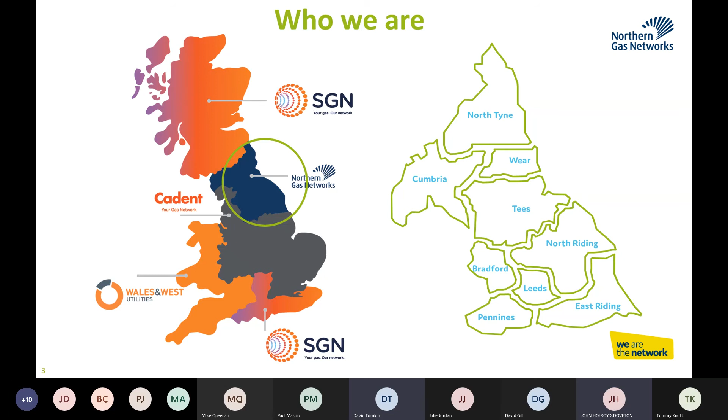So we want to start looking at the why: all this talk of hydrogen and all the need for change. And I think it's pretty much certain that most people accept that climate change is going to be the most significant technical, economic, social and business challenge that we face in the world today, coronavirus aside. The UK, along with most countries around the world, recognises the challenges of this as well.

And back in 2019, the UK committed to reaching net zero emissions by 2050, having already committed to reducing our carbon emissions by 80% of their 1990 levels. And this has been enshrined in legislation under the UK Climate Change Act 2008. But prior to the Leeds City Gate report, which I believe Dan Sadler spoke to you about in the past, little investigation had been done into the opportunity to decarbonise the actual network at the scale to help with this. So everyone, I think, thought it was a dead asset.

So why the gas grid? I think it's pretty much certain that we recognise that it's got a proven history of secure energy transmission around the country. It's unaffected by weather, and it's a world-class grid as well, which heats 83% of buildings and almost all commercial industrial heat as well. So it's a prime place to deliver the energy we need.

The network's been designed to meet the energy demand for weather conditions occurring once every 20 years, i.e. an exceptionally cold day, requiring all appliances on, and it was actually validated back in 2018 with the Beast from the East, and we'll all remember that one. So it proved that the gas network is resilient.

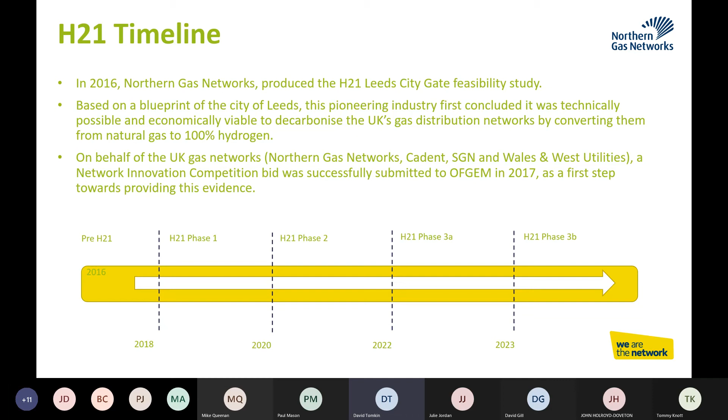So as I've mentioned, it's been identified as a key project moving forward, and we've identified some key pieces of work that will help us demonstrate that we can transport hydrogen safely. So we're going to start looking at some of these things. But I'm going to clear up a few terms before we go on further, because I'm going to be repeating them a few times, specifically what's called an NIC and an NIA, as the programme is made up of a mixture of these. Now, the NIC is the main phases, if that makes sense. Phase 1, phase 2, phase 3.

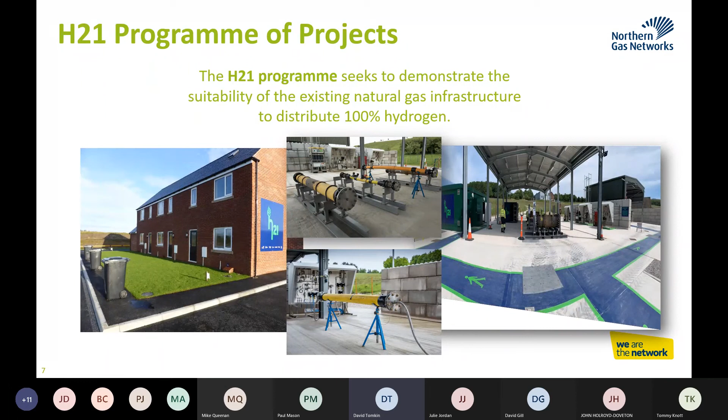And that is called a network innovation competition. So it's a yearly pot of money set aside by Ofgem that the gas networks bid for various projects. Whereas an NIA is a set allowance, a network innovation allowance, that each network gets to fund small-scale innovative projects, and it's part of the price control settlement set by Ofgem. The NIAs aren't focused solely on projects with low carbon benefits, but the NIC is, and the NICs are generally used for the larger funds. So I just want to clear some of them up because we do love our TLAs in the gas industry, the good old three-letter abbreviations, and there's a couple more.

So phase one. Phase one of the NIC H21 project was split into 2 main phases, 1A and 1B. Now 1A was the asset collection and background testing on what was the world's first bespoke facility based at the Health and Safety Science Division in Buxton. That set of tests covered a huge range of metallic and polyethylene assets, valves, joints, fittings and pipes from across the UK and from different pressure tiers and different diameters.

So as part of the Iron Mains replacement programme, a cross-section of these assets had been removed from the network anyway, and some had been in the ground for up to 100 years. So on the specially built leakage test rig, controlled tests were taken with natural gas and 100% hydrogen, as part of that evidence looking into the background leakage on the hydrogen network and comparing the two.

Those tests were completed in March and April this year, and phase 1B that ran simultaneously and a little bit after that involved the consequence testing, and that was done at DNV-GL's RAF Spadeadam test site up in the wilds of Cumbria, Northumberland, and that testing completed in August this year. This phase measured the risks associated with the background leakage from phase 1A, but with the consequence, so the failure of leakage, mains fractures, third-party damage, and anything from operational repairs.

As part of that, it included the probably well-known now hydrogen houses. 3 purpose-built houses were built to very different UK housing stock. One 1920s build, one 1960s, and one to modern building standards. We then simulated hydrogen leaks from a newly installed ring main, as well as a set of allotments we built, so different ground surfaces, and captured any data, including how the hydrogen tracked, dispersed, and compared it to natural gas. It's a really important piece of work to help us understand the consequences of any hydrogen leakage.

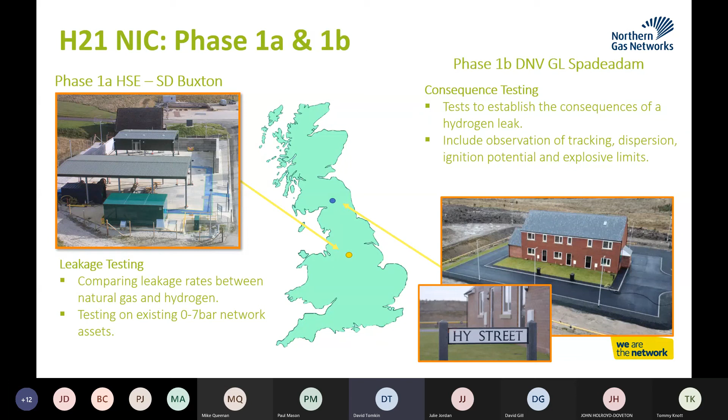So the reports for these 2 tests are due early next year. So obviously, as you can appreciate, the reports are coming in, being finalised, being drawn up with some of the final data. So if there's any questions relating to this, I may not be able to answer them as yet. And when we are ready, they'll have to be shared with our project partners first. But rest assured, when they are available, they'll be publicly available, hopefully early next year.

One interesting piece of the work also related to phase 1 was what's called the social sciences. So we've been working with Leeds Beckett University on this to gauge the public's perception of hydrogen, including any concerns. And as an engineer myself, it's been a really interesting piece of work, and it's different. Most people we found had given very little thought about where the gas or electric actually comes from, or what it was even made of.

The results found that safety is not actually a major concern for the public. They assume that if their supply is converted to hydrogen, it will be safe and robustly tested. And that, to be honest, goes to show just what a world-class safety record we actually have if safety is not their #1 priority. They actually appreciated the safety benefits it could bring with no carbon monoxide poisoning potential as well. And we found that the public were able to digest quite detailed technical information, but they want to be brought along on the journey. And if anyone's interested in that report, it is available on our website.

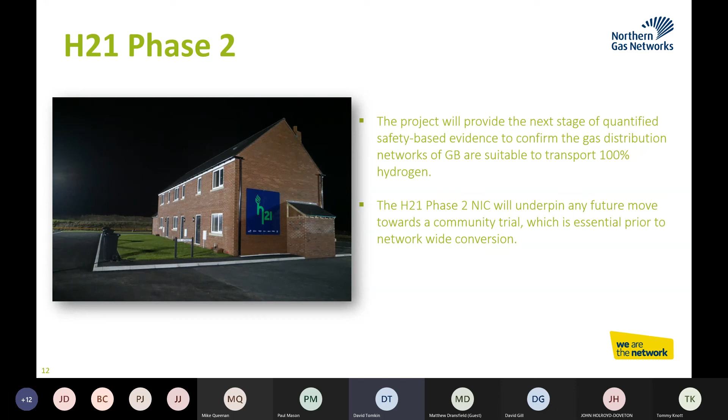The phase 2 scheme, as I mentioned, was granted the £6.8 million at the end of 2019 as the next step. It's again another collaborative partnership with the other GDNs, DNV-GL, the Health and Safety Executive, National Grid and Leeds Beckett University. And it builds on phase 1 for the next stage of safety. And this one is built into 4 sub-phases, which I'll go through now, A, B, C, D.

So the mini grid, as we're building it there, is going to replicate existing gas networks from large to small diameters and up to 7 bar. It'll also be used to assist in the validation of network analysis, something I'll be looking at, and the equations used in the analysis software when modelling hydrogen networks. So the current procedures have been appraised by the HSE, with a test plan being drawn up as well.

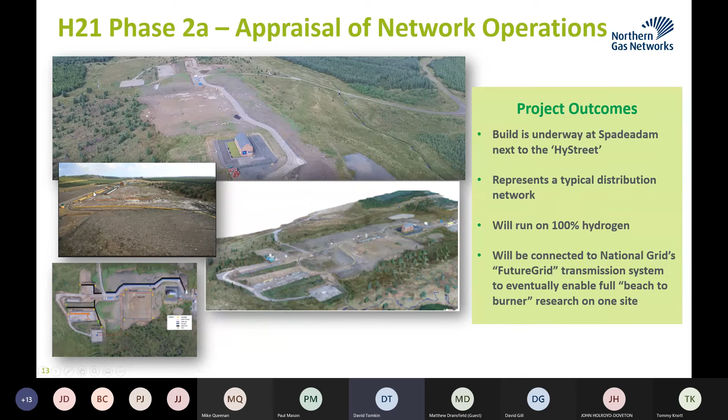And it was announced only this week, on the 30th of November, that National Grid have been awarded their successful bid, and they'll be joining us up there by connecting their future grid, as it's called, to our distribution network. So the aim will be to have a full beach to burner research site in one unique place. And as you can see here, this is the site that we're building. There's the houses, the microgrid, hydrogen reservoir, and it's all going to connect in, and we're starting to put some pipe in the ground. So it's a big site that we're building there.

Now, phase 2B is what we call our unoccupied trials, and this is going to be built in Redcar in Cleveland. And we've secured a site in which a section of the network is currently in use. It's in natural gas, but it doesn't supply any end users. This picture here with our lovely hydrogen car, you can see it's a demolished housing estate, but the infrastructure is still there under the ground. Our aim is for that build to start in January next year, with testing due to commence in March and end late next year. And the purpose of this is to establish the confidence in actually repurposing and doing a conversion on an actual network.

So it's going to be isolated, the location secured while it's all tested in place, and it's going to be again used to demonstrate those operational procedures we've learnt on the microgrid as well. It also allows us to pick up any unknowns, because with the best will in the world you can plan, but until you come across things in real life, we want to see what happens when we actually do it as well. And one of the benefits is the public awareness.

It allows us to demonstrate the potential of this without it being behind closed doors, because a lot of the testing, rightly so, is going on at secure test sites behind closed doors, secret squirrel type of thing. But this has us in the public for people to see what's going on, granted behind a fence, but it is certainly a lot more accessible to see that this is coming. It's not just something they read about in the paper. And we've done community engagement as well as working with the local community.

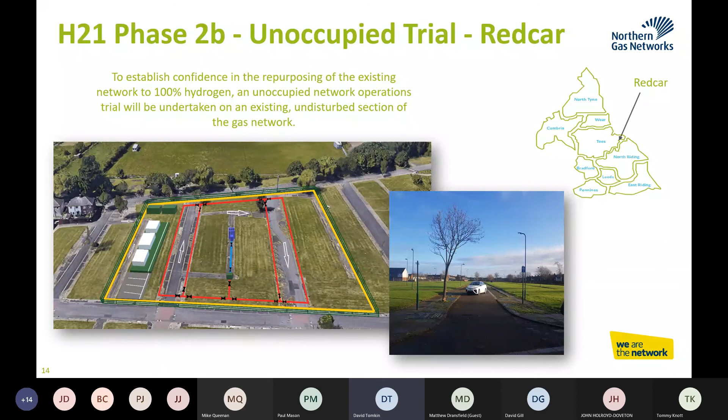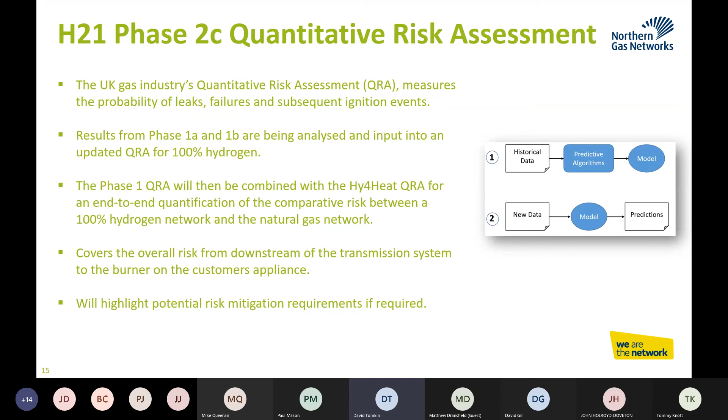Now, again, as with phase 1, this is all building and continuing to build this quantitative risk assessment. And it's going to build on that and also then join with the Hy4Heat downstream quantitative risk assessment to provide a full overview of the risks prior to commencing any community trials. So before we start even thinking about doing this with actual houses, it's a really important time that we join those two pieces of work together and start looking at the risks at that early stage for a holistic up and downstream position, so to speak. So that's one of the details. If anyone asks me questions on the quantitative risk assessment, I'm going to defer it because it is mega complicated.

The social sciences continues as well with Leeds Beckett. But phase 2 is going to take it a step further to look at a way of actually communicating with the public.

Unfortunately, we heard the term fake news. There is a lot of information out there that may not have the most accurate background, shall we say, behind it. So we don't want any misunderstanding or misinformation that could lead to poor customer choices or any unwarranted concern. So it's being open and 100% honest with people as well.

As in a worst case scenario, if you've got widespread misunderstanding and misinformation, it may lead to a wholesale rejection of the conversion, and that option of hydrogen could be lost forever. So it's really important there. And as a network operator, being the main point of contact with the customers in our network, it's our responsibility as the people actually doing the conversion to make sure that people are fully informed to make those choices as well.

So we're going to be looking at the language, tone, format of the hydrogen conversion, and produce resources for people such as a glossary of terms, an animation, and it was an interactive element, but we're not allowed to touch anything at the moment. So that's being re-looked at. But basically, again, a beach to meter display that can be used to explain to people what's going on, but underpinned by 3 core principles.

It's got to be fully accessible, easy to understand, obviously for people who may not have English as their first language. It's not got to involve any selling. So the resource has to enable people to make an informed choice rather than try to persuade them. And it's got to be candid. We need to be open about what we do know and what we don't know. So that's ongoing at the moment.

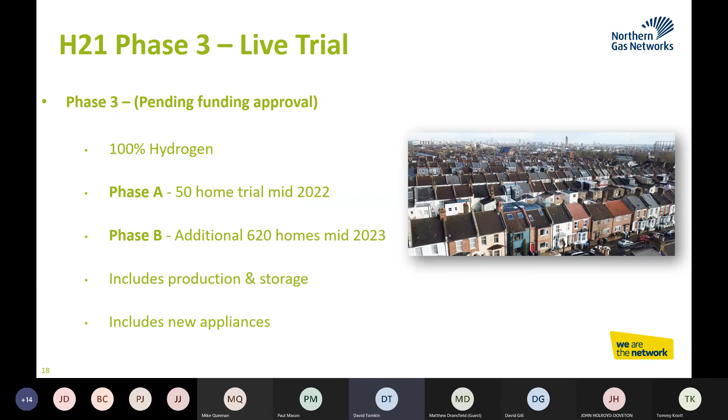They're subject to change once an area has been finalised that we're looking at, because it's not been fully identified yet. But it will include brand new appliances installed in the trial area, as well as the production and storage of hydrogen in the area as well. So they're the NIC projects, but as I say, it's made up of the NIA projects as well, and we have 5 of these that have been identified. Some have started, some haven't, and I'll try and give a brief overview of them.

So we have the 268, which is occupied trials. This is a pre-enabling piece of work to the live trial. So it's not the live trial, but it's pre-enabling works. We want to be in a position where we can hit the ground running once that's approved. We don't want to suddenly be in a position to go, right, where do we start here then?

So this is looking at any legislation that may apply, where we're going to site any potential hydrogen, what hydrogen we're going to use, and all the prerequisite donkey work, so to speak, to get the trial going as and when ready. And that kicked off in September this year.

Our industrial and commercial consumers one, that is looking at and discussing with customers on our network what mitigations they need in order to convert to hydrogen. You've got places like potentially glassworks, glass manufacturers that don't like being turned off, for obvious reasons. You've got to think of things like hospitals, care homes, the local fish and chip shop. So it's engaging with those people and manufacturers of appliances. So that started in September, so it's early stages as well.

And this one, the hydrogen supply strategy, which I'm currently project managing, I've been given that duty wonderfully, is the initial hydrogen supply strategy. So it's a high level strategy look to see where we will start in the first few years and year one of conversion. So it's looking at the sample area. How do you start converting? Where do you start? What do you do? So how will it be produced? Where the production centres are going to be located, etc., etc.

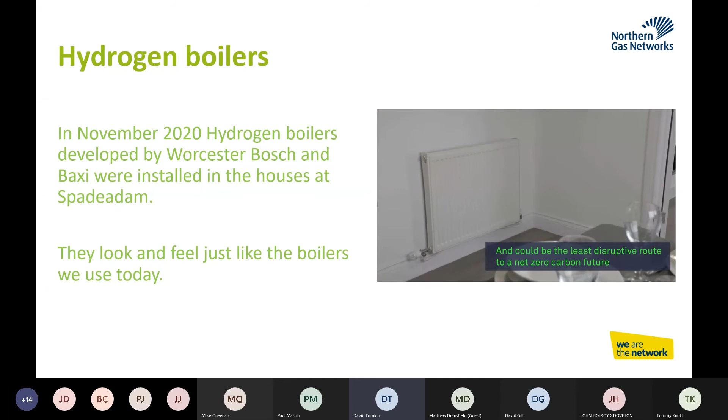Hope that came through and it wasn't too jumpy, because I know I've seen some awful ones in some other webinars, so hopefully that's not one, and hopefully this one isn't as well.

So that was H21. I'm just going to give a little bit of an overview, then play the video to the HyDeploy 2 project. Now this is blending of hydrogen. It's not something I'm directly working on, but I've got colleagues within the business who are working on this, and our project manager Adam Madgett is the NGN lead on this.

But it's going to be blending 20% into the existing network safely. It's located outside Gateshead in the northeast, and I'll play the video, and hopefully this one works as well. It's about two and a bit minutes as well, so hopefully it doesn't put you to sleep on this one.

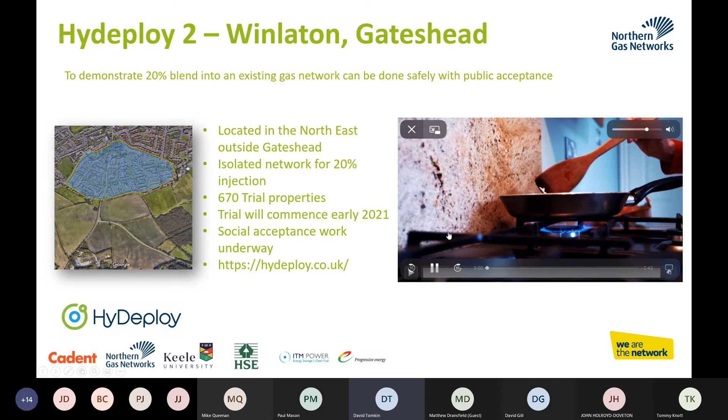I'm Linda, and I live in the northeast of England in a little village called Winlaton. I had a letter, opened the letter and had a quick look, and then looked again and thought, hydrogen? That seems an odd concept. Have I misread that? I'd just never heard of it, didn't know anything about it, so was quite intrigued to find out a little bit more. The aim of the HyDeploy project is to demonstrate that a blend of hydrogen up to 20% can be utilised and distributed safely within the gas network. We'll be looking to carry out a public pilot into 670 homes in an area called Winlaton. So all them homes will be heating and cooking on a blend of 20% hydrogen.

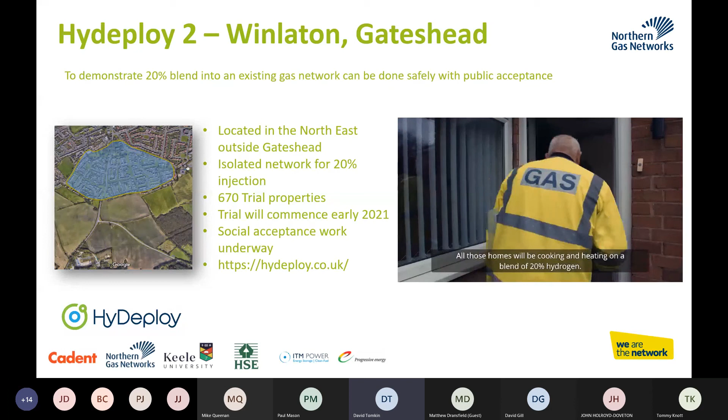When you burn hydrogen, there's no carbon emissions. So introducing a blend up to 20% will reduce the customers' and the gas network's carbon footprint. We've got a very challenging target in Gateshead to be carbon neutral by 2030. A trial like this will actually play an important part in that. But the great advantage of hydrogen is that it's a very environmentally friendly, very green way of transporting energy. The real benefit for HyDeploy is that customers don't have to make any changes to their appliances when they're using a blend of hydrogen and natural gas, and we as gas networks don't have to make really many changes as well.

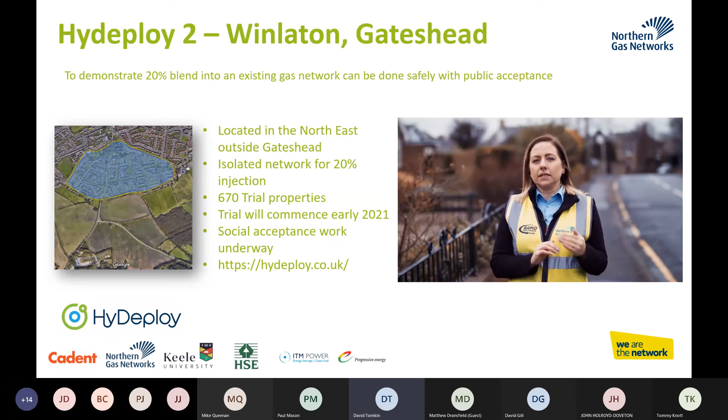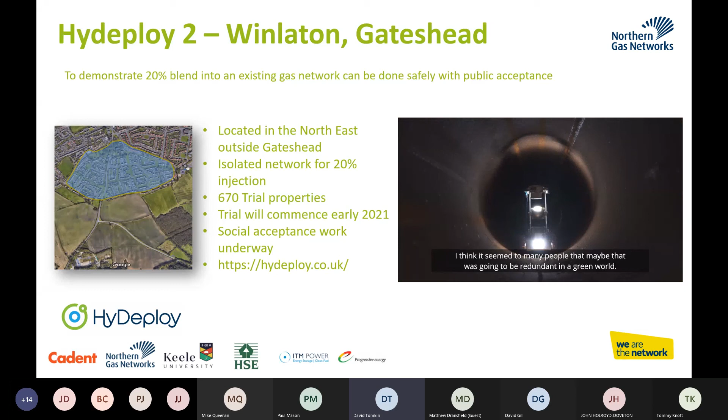So one of the big things that was reassuring for the customers is the fact that there'll be no difference at the home, there'll be no difference to how they cook, heat their home, and there'll be no impact outside. So it's very clean and easy for us to turn the hydrogen on, and they won't notice the difference at all. Of course, we've got this great asset of a wide-ranging gas network, and I think it seemed to many people that maybe that was going to be redundant in a green world. Well, with hydrogen, that's not going to be the case.

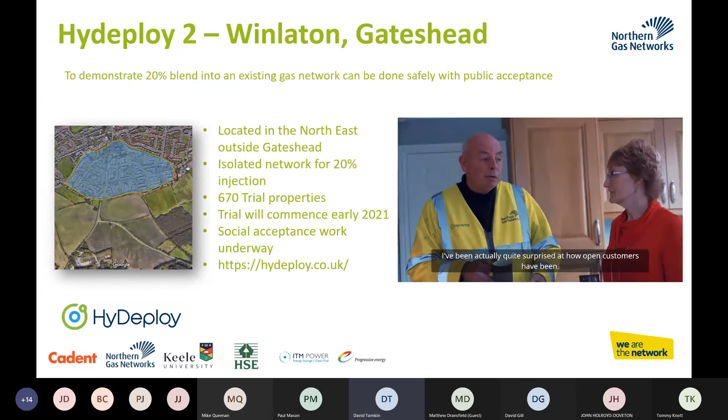I've recently become a grandmother for the first time, so very conscious of how my little grandson, who's not quite one yet, is going to grow up and what world he'll have there. So whatever we can do to help reduce the carbon emissions and everything that's happening with the cars and pollution and anything that we can do. And it has actually made me stop and think, what else could I do that may help a little bit? I've been actually quite surprised at how open customers have been. Yeah, we see it as a bit of a stepping stone to the potential for a 100% hydrogen gas network. So it allows us to build confidence up with public perception, but also our own capabilities to be able to introduce a different gas mix into the networks.

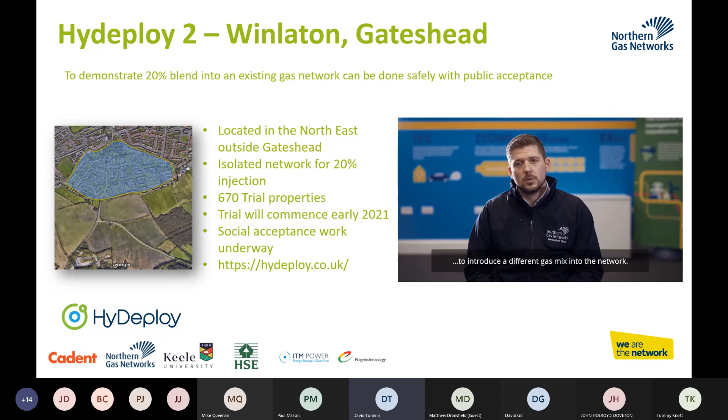So hopefully that gives you a bit of an idea about HyDeploy 2. Now, I will mention that HyDeploy 1 wasn't a straight-to-video episode. HyDeploy 1, as it was called, is actually ongoing at the moment at Keele University. The difference is that the Keele network is a private network owned by the university and on their campus. But at the moment, they are blending hydrogen there and they're running it round.

This will then be moving it on to be the first into a public network. So the little village of Winlaton will hopefully be a world first. Well, certainly a UK first anyway. The project partners are as you can see there. So if anyone would like to know more about HyDeploy, please do visit their website.

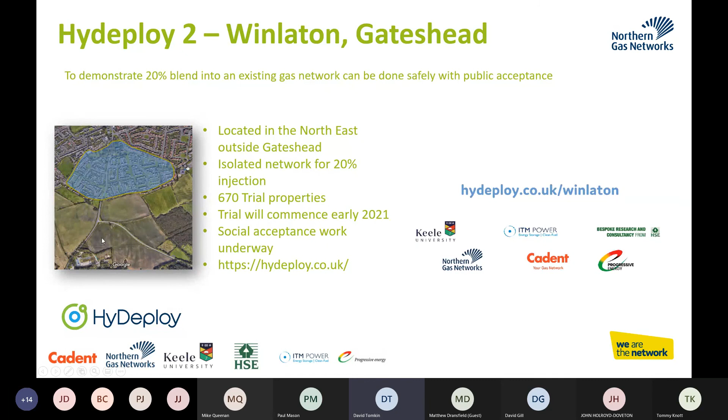But I will just note at the bottom of this picture of Winlaton this little site here, because it will lead us nicely on. It's one of our gas sites called Low Thornley. Now, Low Thornley is where we are building a research laboratory. The Low Thornley site is about 15 acres. It has high pressure gas distribution in there. It has everything. And it was an old outreach research station to the old British Gas research labs. So it's got a history of this sort of thing.

But InTEGReL stands for Integrated Transport, Electricity and Gas Research Laboratory. Bit of a mouthful. But its idea is to be a whole integrated energy systems and demonstration facility for industry, academia, small and medium enterprises and the government to look at new green energy technologies, building strategies, transport, electricity, all in one place. And it's working with Northern Powergrid, Newcastle University and others as well.

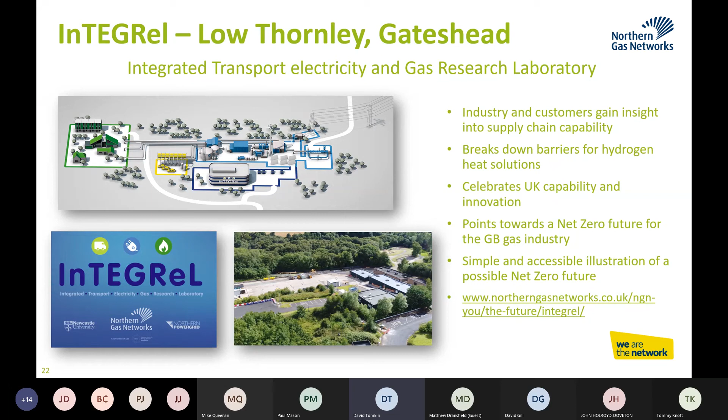So again, it's really impressive what they're actually looking at building there. All sorts of different houses, including a block of flats, I believe, as well. They're different building styles, all built to 1910 and the actual original building standards for each era as well. So it's quite good what they're doing up there. Again, if anyone would like to know about that, have a look at their website or get in touch with us.

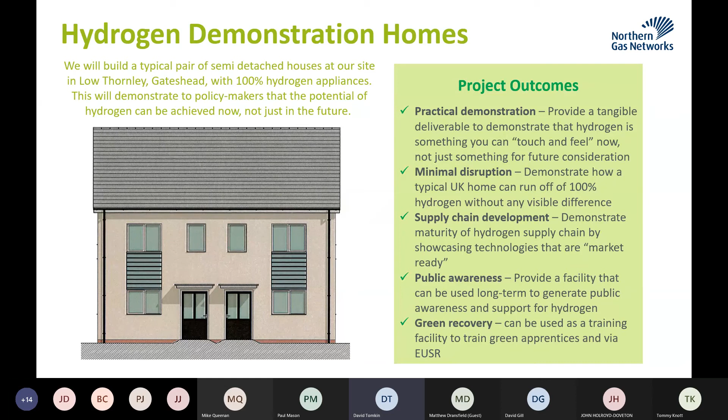And on that site, there's going to be some more hydrogen demonstration homes, and they're currently in the process of being built and planned. The aim is for them to be show homes, to allow consumers, policymakers, anyone to come and have a look at these houses to see that this isn't some sort of tomorrow's world thing, that it can be done and can be done now. And fundamentally, as an ex-apprentice myself, these can be used as a training facility for the next generation of engineers who we're going to need to train on new green technology.

So it probably just leaves us with a final thought. If the 19th century was dominated by town's gas and the 20th century by natural gas, could the 21st century be dominated by hydrogen? We'll see.